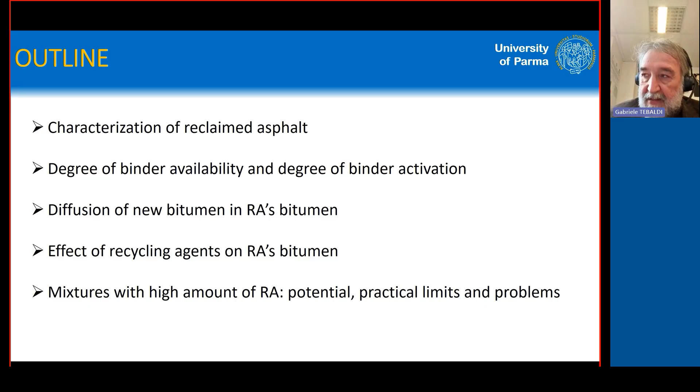I've faced this in my research activity, but I think it's something everyone can face when the amount of RAP goes above 30%. So we can discuss what we can define as a high amount of reclaimed asphalt. We will discuss some practical limits and also some problems related to this particular choice.

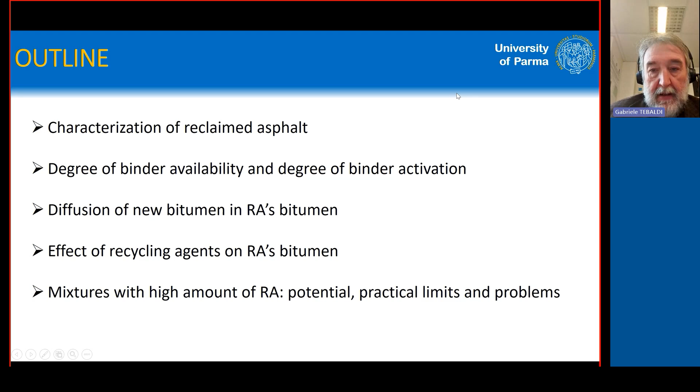So basically we have something we can define as a black stone, a stone covered by aged bitumen, and in general these are the smaller particles. Or what we can define as an agglomerate of stone, or cluster, that is basically the biggest part. These are the biggest component of reclaimed asphalt and are again mainly the result of the milling operation.

In addition, we don't talk about it much, but we have to remember this is one of the most important parts: we have another component, that is the water. The water arrives from the milling process, or from moisture, environmental moisture, or from weather, rain, or other conditions that can affect the RAP if the stockpiles are not covered. We will discuss a little bit more about that.

So these are the elements that we have in hand when we start to discuss reclaimed asphalt. We will go back to this concept several times, but I'd like to underline very clearly that one of the most important characteristics that we always have to remember about reclaimed asphalt is the heterogeneity. It's extremely complicated to have a stockpile of RAP, and even in the same stockpile, the same material, the difference between components is the most important characteristic of reclaimed asphalt.

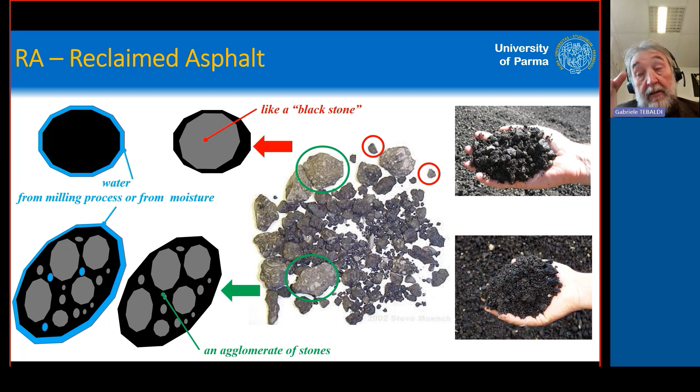Because in one case we have all the weather conditions we can imagine. On the other side, we have just one condition: no light, no rain, same temperature. It's just an extreme example, but if you keep that in mind, you can understand the difference we may have in material that comes not only from the same road, but in some cases from different roads.

What is the origin of the RAP? Again, this is another part that creates this heterogeneity. The RAP comes from an old pavement, so let's say the generation conditions are the traffic load, because different kinds of traffic load can cause different kinds of action in the bitumen, some kind of mechanical massage or mechanical condition that acts mainly on the stone part, but generally acts overall. And we have to remember there are different kinds of aggregate, and different kinds of aggregate interact differently with moisture that comes from snow, rainfall, whatever.

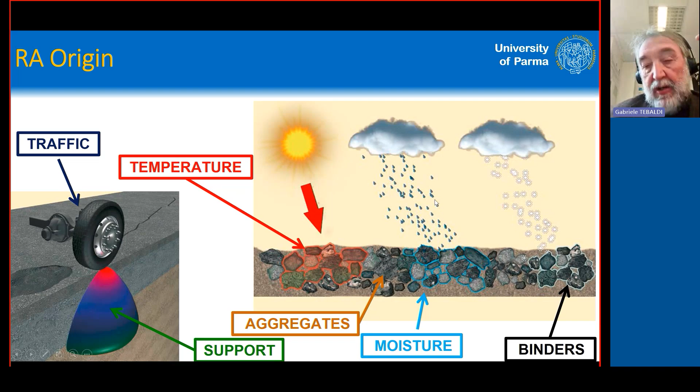We have different kinds of binders in the surface layer, the binder layer, or generally in different parts of the pavement, and each has different results when facing weather conditions, temperature, and aging.

But we also have another element of difference: the characteristics of hot mix asphalt. We may have several types if we move through different wearing courses, and vertically in the pavement. We may have OGFC, stone mastic asphalt, rubber asphalt, whatever. With different kinds of aggregate, we have a very stiff and resistant aggregate in the surface, maybe limestone in the base. So different aggregate, different size distribution, everything can be different.

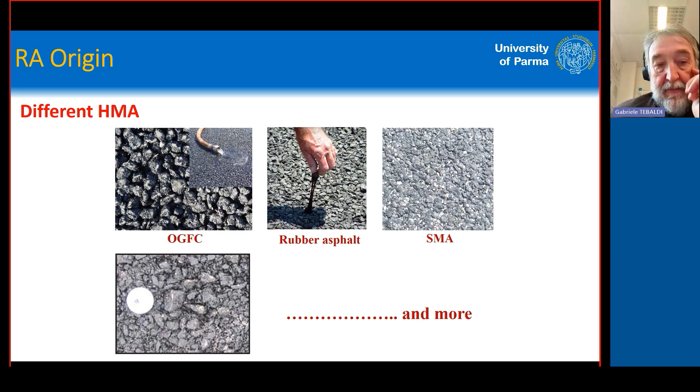These different elements can be made more heterogeneous by the milling operation. The milling operation creates different size distributions in the RAP depending on the capability and force of the milling machine, the speed, and how deep we go. For example, one extreme is a full depth reclamation with everything mixed inside, or we may have a fractionated milling operation, or organized milling operation, where the pavement is milled layer by layer and the material is stored in different stockpiles.

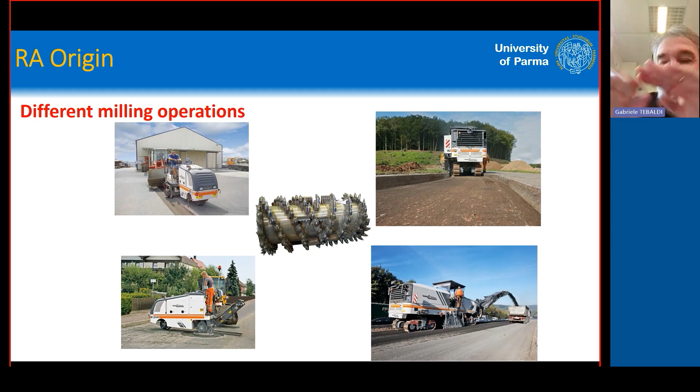Another variable is the pavement condition, the damage level. If we have a pavement with just aged material, we have something. If we start to have polishing, changing aggregate condition, different rutting, it means we have different behavior of the bitumen and whatever else. So that's another level of variable.

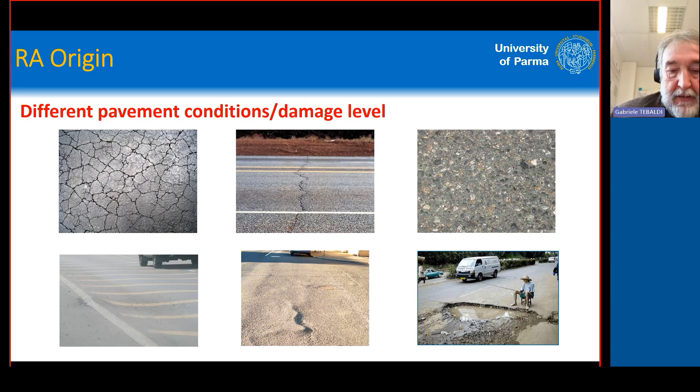Even in this chaotic ensemble of variables, we also have the storage condition and storage time. If we keep the material covered, we'll have less moisture inside than in the case of stockpiles stored outside under weather conditions.

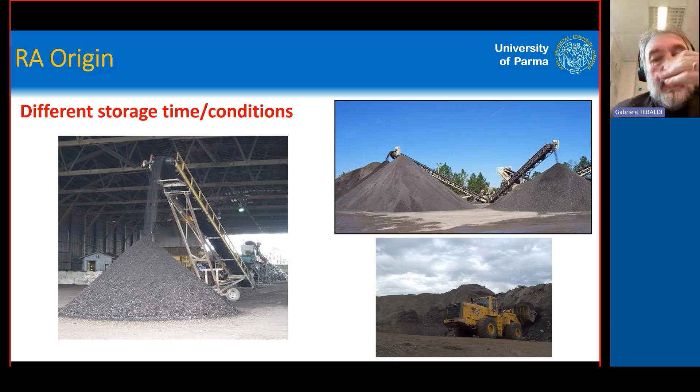But also the time in the stockpile and the location within it changes the characteristics, because if material is on top, it's probably there for a very small time. If it's at the bottom, it's probably there for a long time, under high pressure, with less temperature change, or maybe higher temperature, and this can affect the characteristics of the RAP.

How does all this list of variability impact the characteristics of our reclaimed asphalt depending on its use? As I said, we focus our attention on hot recycling - how we make the asphalt mixture with RAP in hot recycling, following the hot recycling technique.

We have a plant that makes the material. In this case, we have some kind of Los Angeles test, if we can discuss it - so we have abrasion, compression, and different actions on the aggregate. And after that, we have the action of the roller compactor that gives another shear and pressure.

If we have what we decided to call before, black rock, we probably have only the effect of temperature and some loosening or softening of the bitumen. I say probably because if we act with a very strong force, or the aggregate is weak, we may also have some breaking, some polishing, some cracking in the aggregate. But generally speaking, we can say the main action is only temperature.

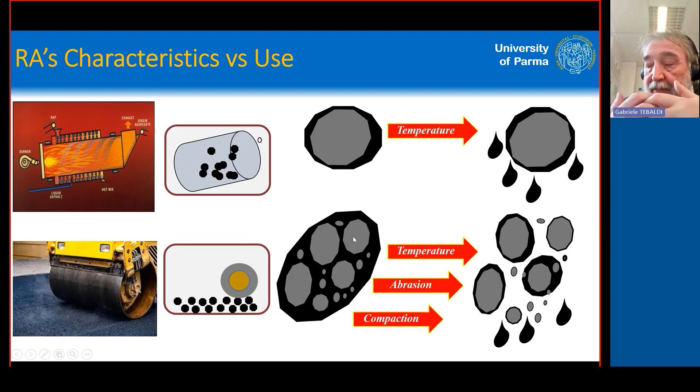But if we have a cluster or agglomerate, all these actions - friction, abrasion, compression - change the characteristics, the size distribution of the RAP, because the cluster is divided not into all fundamental components, but into several parts, due to abrasion and compaction. And again we have the action of temperature, which in this case works in two ways: making the bitumen softer and maybe loosening it, but also weakening the connection among the particles of the cluster, which can increase the disruption of the agglomerate.

And what we have, in terms of the stability of the size distribution - I like this concept because we have to remember, as I mentioned before, we have some changes in the size distribution. So for a good mix design, we need to understand if the size distribution of our RAP is stable or not. Why? Because if it is not stable, we may have problems - we'll have changes. And every change that is not under control, in my opinion, is a problem.

So if we're in the part of the RAP where there's a smaller piece that we can again call black rock, we don't have so much problem in terms of the stability of the size distribution.

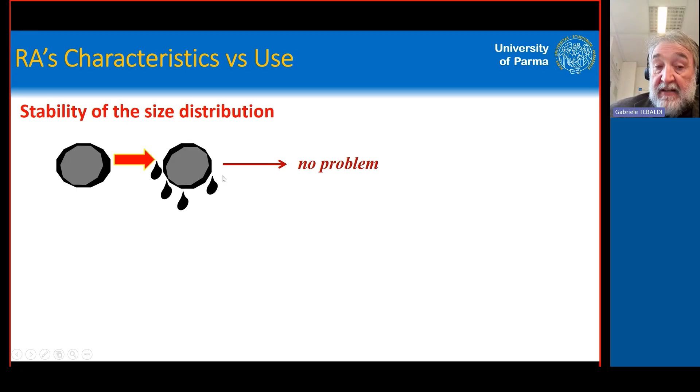If we go with the cluster, the point that we have to keep in mind and the characteristic that we have to analyze is that there is a risk that the final grading curve is not the one that we think, or that we designed in the mix design phase, and we will not find in the construction phase.

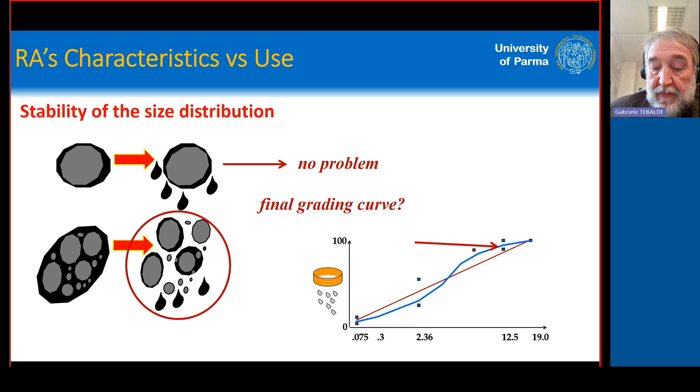If we don't correctly account for the amount of cluster in our RAP, we may have the opposite result: a size distribution that originally is inside the standard requirement can go out, especially in the coarse part. And of course, changing the size distribution in the coarse part also has an impact on the fine one.

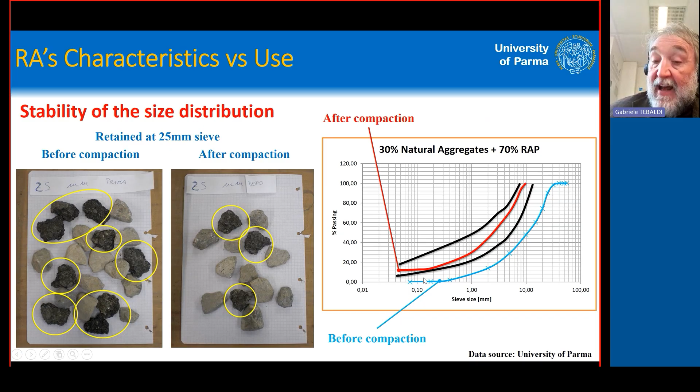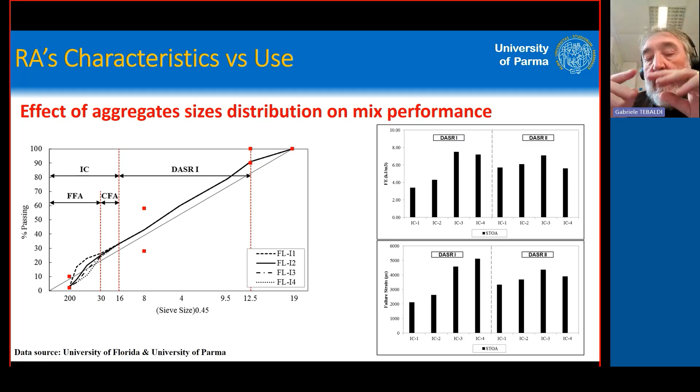And if we go back to this example, this was made on purpose to bring the size distribution in, but can you imagine if a change like that happened unintentionally in a mixture, what kind of behavior we would have? It's very easy to set a very good mix in the mix design phase, and at the end, if we are not accurate in the control of the RAP, we may have a very negative impact on the final performance.

This is important, a concept that is important to understand. If we work with less than 20% RAP, we are in an amount that can induce a level of change that is inside the variance of the test, something that is negligible.

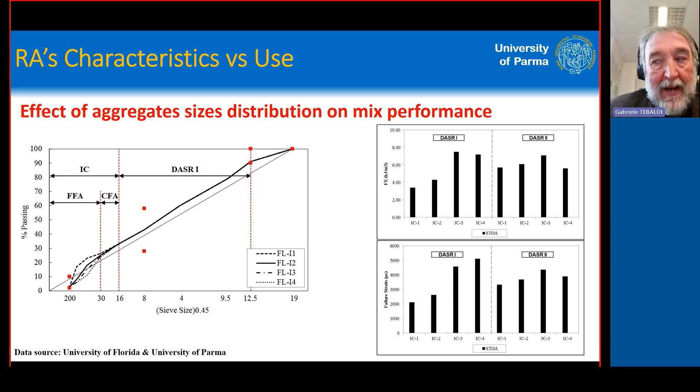When we move forward and go above 20%, with 30, 40, 50 and even more, as now required by a lot of agencies, there is a very big risk that what we did in the mix design phase is not what we have in the field if we are not very accurate considering this element.

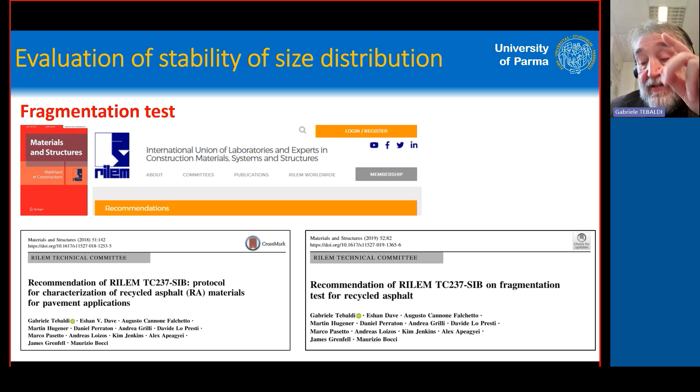A proposal to face this problem was made a few years ago by the RILEM Technical Committee TC237, led by Manfred Partl. Among the technical recommendations that came from the activity of the technical committee, there was one on how to characterize reclaimed asphalt, and especially one test inside this protocol named the fragmentation test, exactly designed to analyze the problem I just described.

The fragmentation test is a very simple test that consists of evaluating the material passing a control sieve before and after compaction.

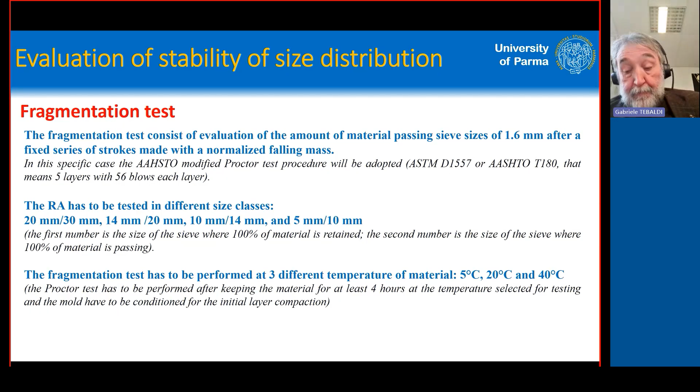Following a French standard for aggregate, the RAP is analyzed in different size classes: 20-30, 14-20, and 10-14 and 5-10, just to have a different idea and to analyze in more detail the size class where it's possible to have clustering. And it's performed at 3 different temperatures to take into account the contribution of the bitumen.

So basically, what does the test consist of? The test consists in taking the RAP, checking with a control sieve, looking at the amount passing, doing the compaction with a Proctor or maybe gyratory compactor, but the idea was to use Proctor.

And again check the material passing on the control sieve. Why the Proctor and why a control sieve? The idea when the test was decided was to have a very, very simple test in order to have something that can be efficiently used in the field.

We cannot have in quality control a test that gives us 100% of information but requires 1 week. Too much time. If we are doing quality control in a paving operation, we need information very fast. Otherwise, we are not in a condition to stop something that I won't say is wrong.

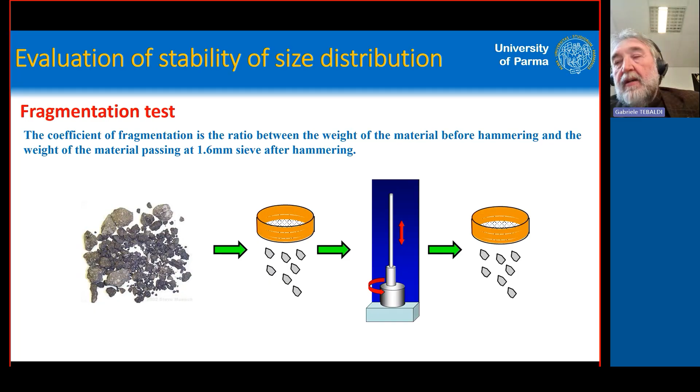This test gives just an alert. The alert says, be careful, the material you are using is not the same as what you tested in the mix design. It's up to the field engineer to decide if this is just a minimum variation or if it's an important variation. And I'll show you some data related to the effectiveness of this test.

During the round robin to validate the test, we tested 2 different RAPs from 2 different parts of the world. You can see here that these 2 different RAPs give different results in terms of coefficient of fragmentation at different classes. So these 2 RAPs, even if apparently similar, are not in agreement in terms of behavior after compaction.

You can see here that changing the temperature, there is a change of the coefficient of fragmentation that is very similar at the 20-30 class, but is totally different at the smaller size, the 5-10 class, and is even different again at 14-20. It means that probably in this case we have a very stiff RAP with very stiff bitumen that only shows differences at the high temperature.

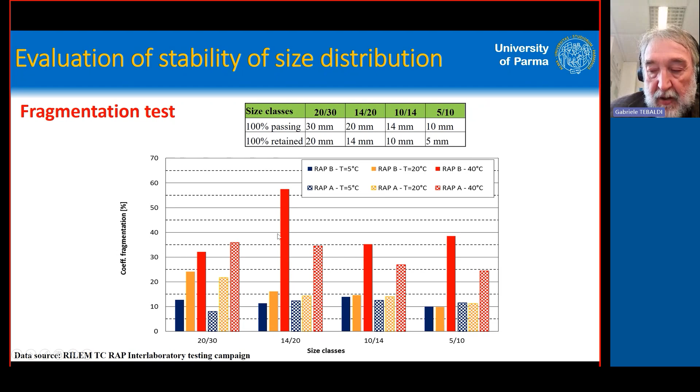Just to show how it's possible to identify changes, we decided to validate the test by taking 2 different materials. One is a normal RAP that we took from the area around Parma, generally a binder RAP, so limestone. And we also took some steel slag.

And we tested 100% RAP, 50-50 — okay, not realistic, but the idea is that in some cases you may have stiff aggregate, a blend of stiff aggregate, or a blend also including steel slag, which in some parts of Italy is currently used for wearing courses.

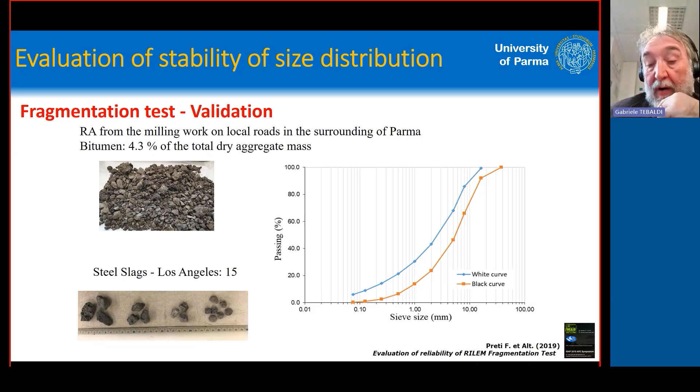So as you can see here, if we have 100% RAP, this is the result of the analysis. But if we move to the same size distribution with 50-50, we have a change in the passing at the control sieve, and this is even more pronounced if we use only 100% steel slag.

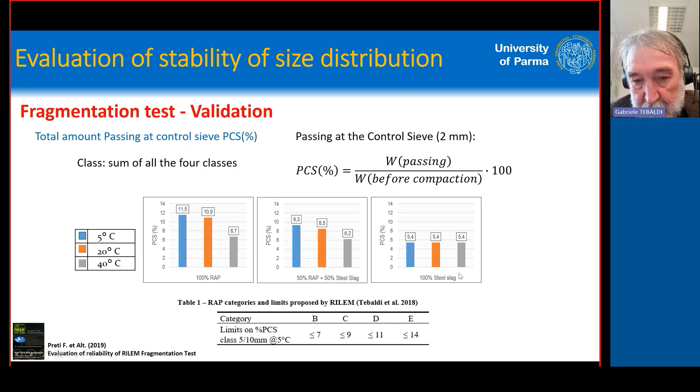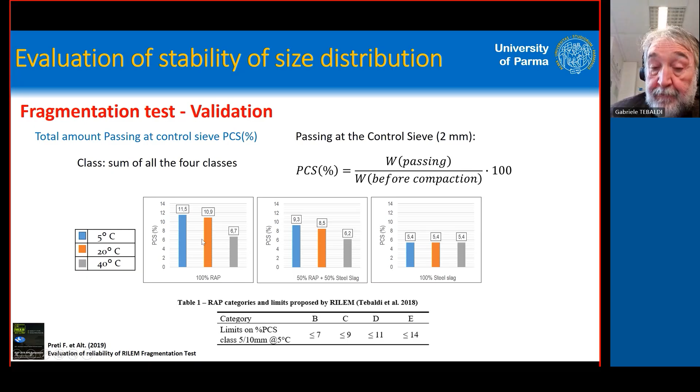So what does it mean? It means that the test is really capable of identifying changes in the stability of the size distribution, because with steel slag, if you compact it, there is almost no change before and after compaction — it's too stiff. But if you compact different kinds of RAP, the value changes in relation to the amount of agglomerate.

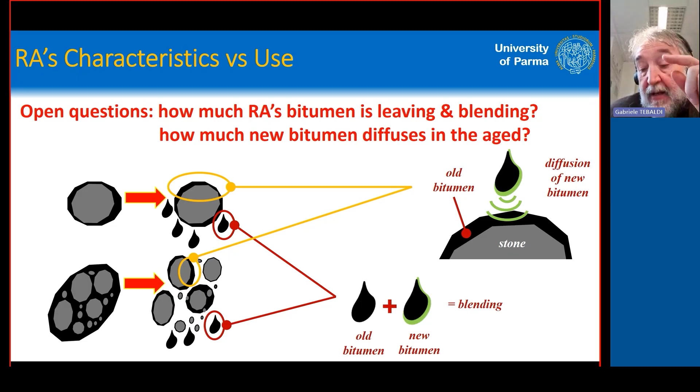The second point we have to remember is the amount of bitumen that is available or can be available, and which kind of phenomena leads the blending. It could be simple blending or diffusion. In my opinion, the bitumen that leaves the RAP is not a lot.

We did a test a long time ago when I was cooperating with EMPA: we made a mixture with just natural aggregate, coarse, and fine RAP, with a very clear difference in size distribution in order to have fast separation with a sieve. Mixing without any bitumen added and recovering the bitumen, we found almost no bitumen in the natural aggregate. We were analyzing just the fine part with the RAP, which had a lot of bitumen, and in that case we found 8%. So there was no bitumen leaving.

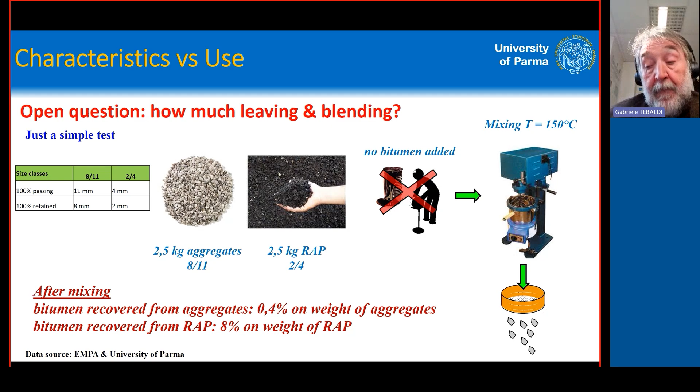Of course, this can change depending on the different condition and characteristics of the RAP. But something that is clear: the other part of the blending can happen through diffusion.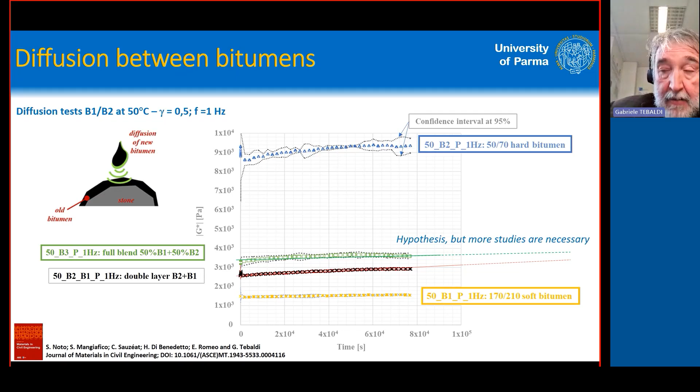So the hypothesis, though of course there is a need for much more investigation on that, is that during the time there is an increase in diffusion that at the end brings a full blending.

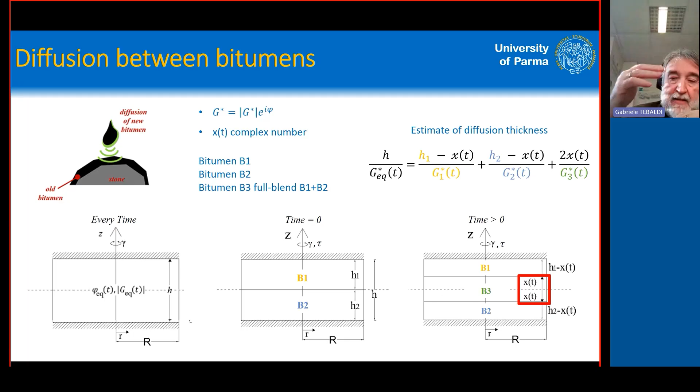I can give more details but just for time, we were able to put together a law to predict the diffusion thickness, and everything is related to the complex modulus. You can see here that over time, the blended zone increases until there is not anymore B1, not anymore B2. It means that the two layers, the coating of the new bitumen, step by step, goes inside the old bitumen.

This is relevant to consider when we design our hot mixture in function of the bitumen that we have in the RAP.

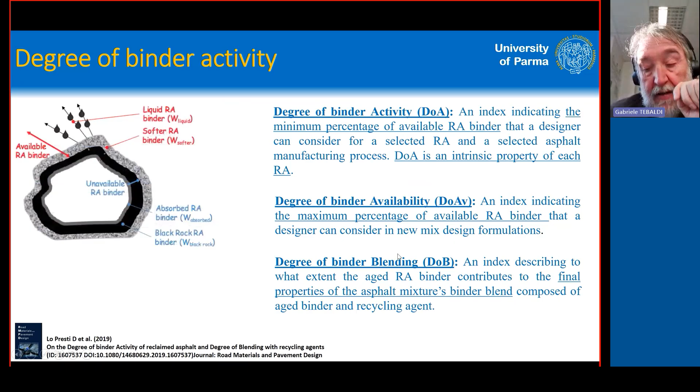Some years ago, a group of researchers led by University of Nottingham put forward three definitions: degree of binder activity, an index that indicates the minimum percentage of bitumen available, so the bitumen in the RAP that is still active to bind our aggregate; degree of binder availability, the amount of bitumen that could be available, which doesn't mean it's active, just available; and degree of blending, the amount of bitumen inside the RAP that combines together with the fresh bitumen.

This is a very complicated concept, simple to show but complicated to prove. This is basically the evolution.

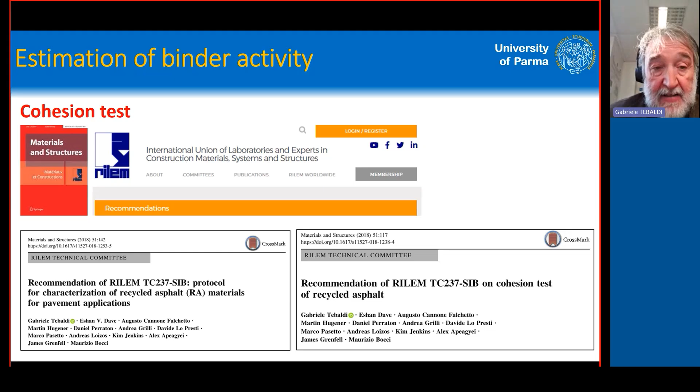Again, there was a proposal from the SIB of RILEM in the protocol to try to get an estimation or indication about the amount of available bitumen. This is called the cohesion test, again very simple, in order to provide a device that identifies differences very fast in the workplace. This is a very simple test.

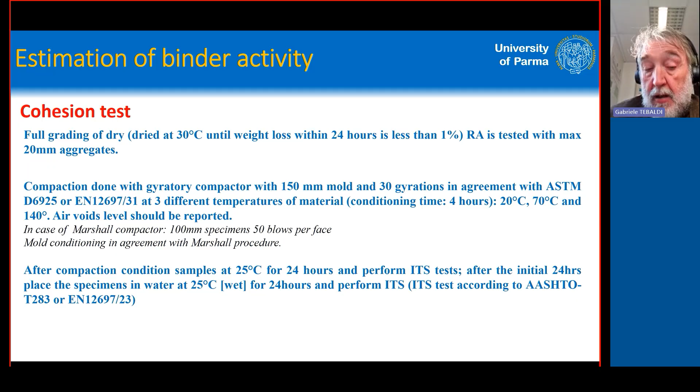The RAP is compacted without any bitumen addition, compacted at different temperatures, and we look at the possibility of having a specimen, and how is the IDT stress of this specimen tested at 25 degrees.

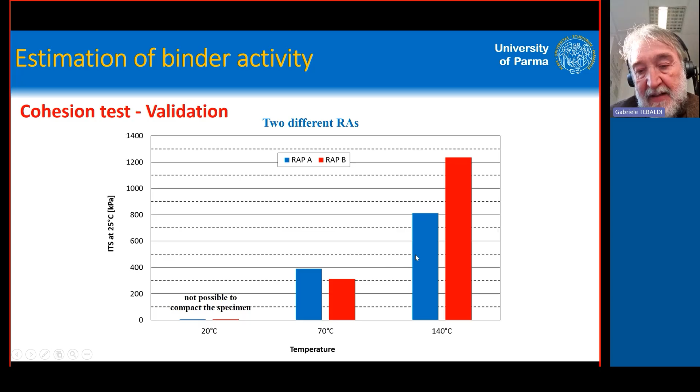Again, to show how this test is able to catch this difference, we used the same RAP, made two specimens, and aged them artificially. Basically what we did was put them under sunshine for one month and boiled for one week just to force aging, then compacted at 70 degrees and did the test.

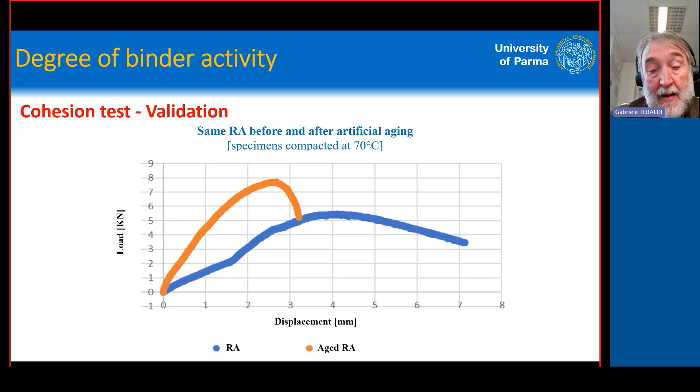Very simple in terms of load and displacement, nothing complex, but something that is easy to repeat and do. You can see here that the aged one is definitely much stiffer than the original one, even though it's the same bitumen. So it's possible to catch some difference. Again, if we compact at 140 degrees, the difference is less, but there is still a difference between the aged one and the not-aged one.

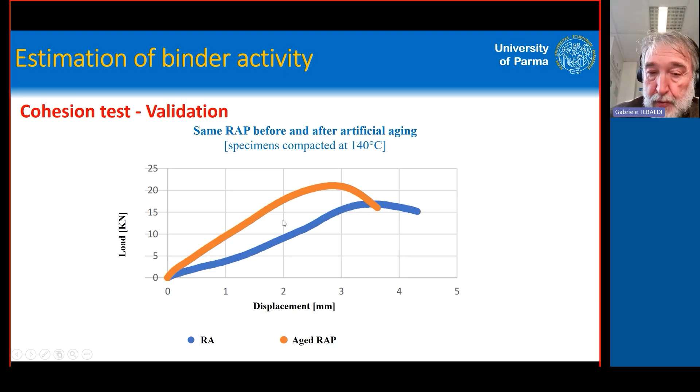Again, I don't see that this is something that can make problems, but it's for sure something that the field engineer has to consider. We have to remember that the size distribution and the air voids can have an impact on this way to estimate.

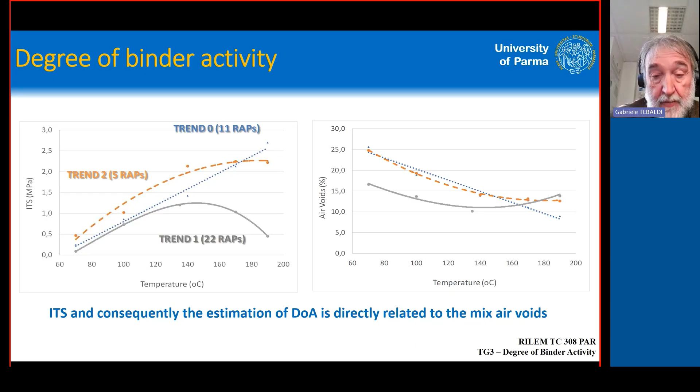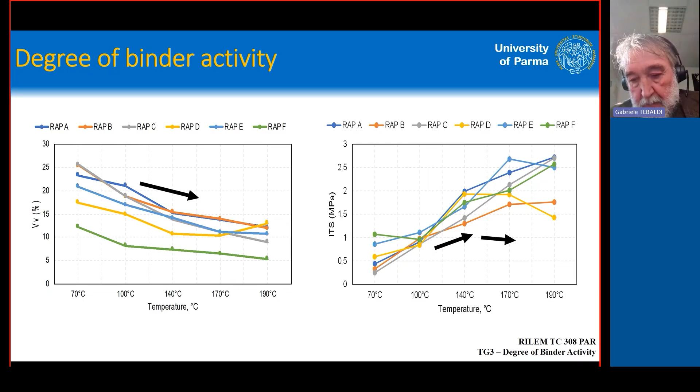This is a general trend that shows there are a lot of difficulties to identify a common behavior. But if you put a lot of sources together, there is the air void that is reducing - the level of air void goes down as we increase the temperature, that makes sense - but the IDT follows the temperature only up to one point, and that makes sense because once the skeleton starts to, there is some kind of plateau performance. This is the reason we can talk about estimation and not evaluation, so we have to really keep that in mind.

If we move to the idea of using as much as possible of the available binder, we have to keep in mind that the bitumen we have in the RAP can be organized into these categories. So we have the absorbed bitumen that doesn't go anywhere, and the fully aged bitumen that we can call unavailable bitumen.

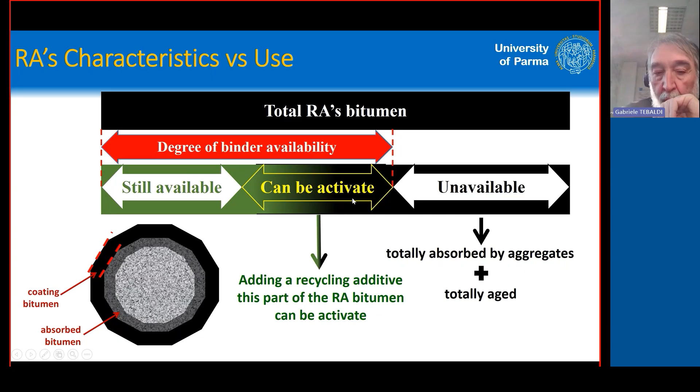But beside that, there is bitumen that is still available, not totally aged, so there is still some characteristic that can make it like available bitumen, or bitumen that doesn't have the characteristic to work but that can be activated. This is the area or the amount of bitumen where we can work to optimize or maximize the effect of recycling, because however much we can activate of the bitumen that is aged but potentially active, that increases our degree of binder availability and, of course, increases the amount of bitumen that we save.

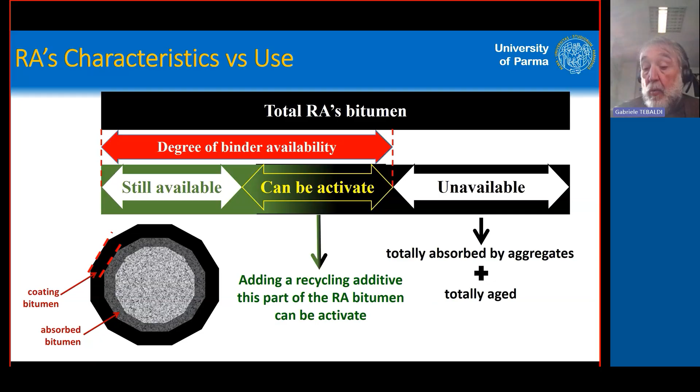If we go a little higher, a solution can be soft bitumen. This is an investigation of the state of the art provided by Laurent Porot. And if we go above 30%, it's common to use different kinds of additives, rejuvenators, fluxants, or whatever, to make available and active the bitumen that comes from RAP.

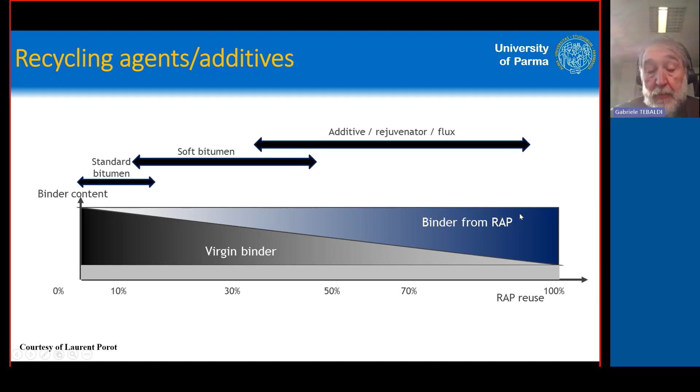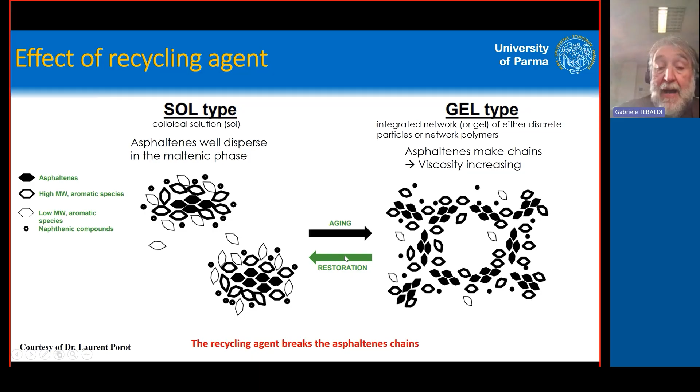It's hard to classify the recycling agents because there are a lot of patents and secrets, but generally speaking, we have recycling agents that work on breaking the asphaltene chains and reduce the viscosity of the material. There are other recycling agents that break the asphaltene compounds.

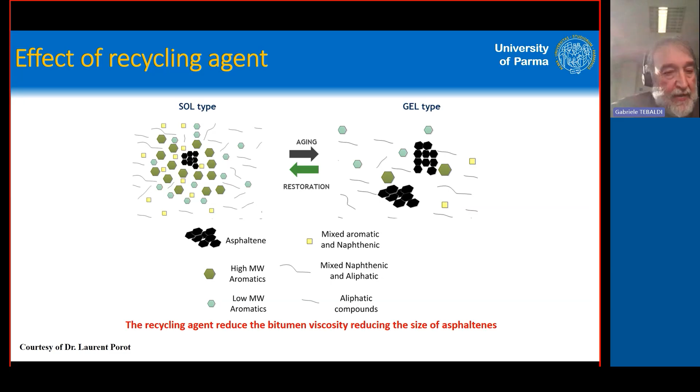Again, looking with the goal to reduce the viscosity of that. There are also, and this is part of the recycling agents, bio-oil or bio-based agents that not only work on breaking the asphaltene chains but also provide some oil that restores or brings back the level of oil or volatiles.

We have to remember very clearly that we call it rejuvenation, but there is no real rejuvenation. The aged bitumen is still an aged bitumen. What we can do is attack, let's say, the bad part of the aging, and we can mitigate the effects of aging. But we always have an aged bitumen in the end. This is something that I think is extremely important to remember.

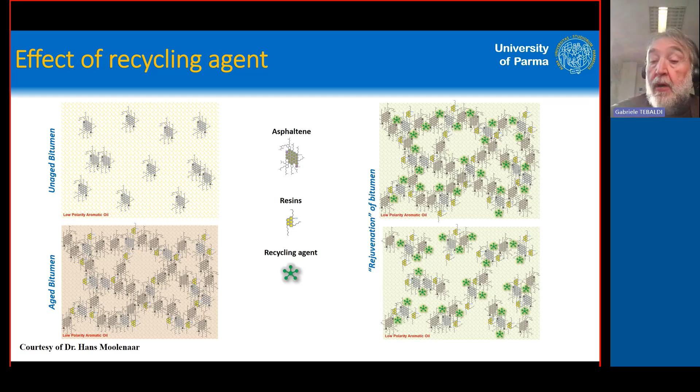If we look a little bit at the performance, we see that generally speaking, when we insert a recycling agent, we have an increase of the penetration.

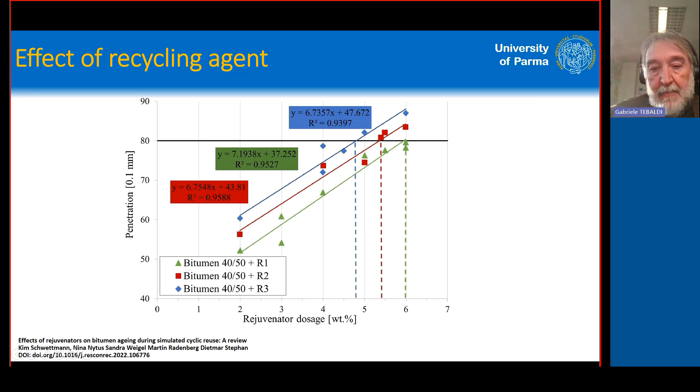This is research I found in the literature, a literature review. Work done in Germany clearly showed that bitumen with recycling agent becomes softer than the aged one. Another work in Germany shows that different levels and kinds of recycling agent reduce the softening point, the ring and ball point of the bitumen, while aging brings the condition of the bitumen back in terms of softening point to the original one.

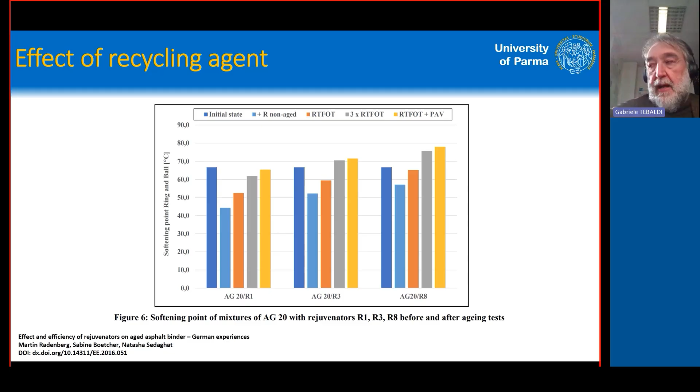So basically, recycling agents bring back, but give still the same level of performance or the evolution of performance compared to natural bitumen. A work made by Professor Canestrari in Italy shows also that, from a different point of view but similar effect, if we add a

recycling agent, we are able to reduce the stiffness. So the G star of the different levels of aging of the same bitumen are lower than the original one. So with the recycling agent, we reduce the stiffness of the bitumen.

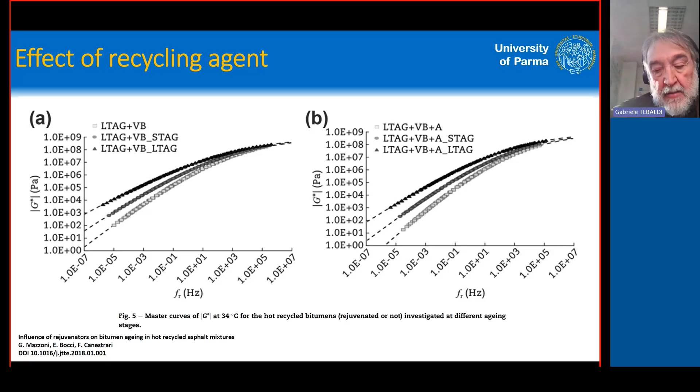That's generally one of the main concerns related to viscosity, together with the fact that viscosity doesn't allow proper coating. This is something we have to always remember. This kind of evolution in terms of softening point and penetration point, in my opinion, is a little bit empirical, but

is extremely important to keep in mind. Why? Because if the agency does quality control of the final mix or the bitumen of the final mix, they only check penetration and softening point of the recovered bitumen. We have to check something like that, because in recovering the bitumen, we force the full blending of the material, and at the end we have

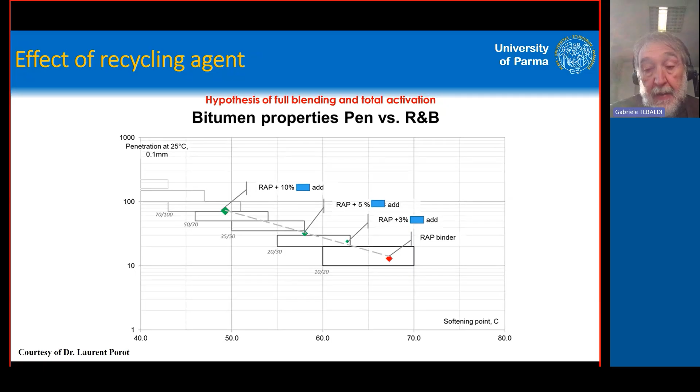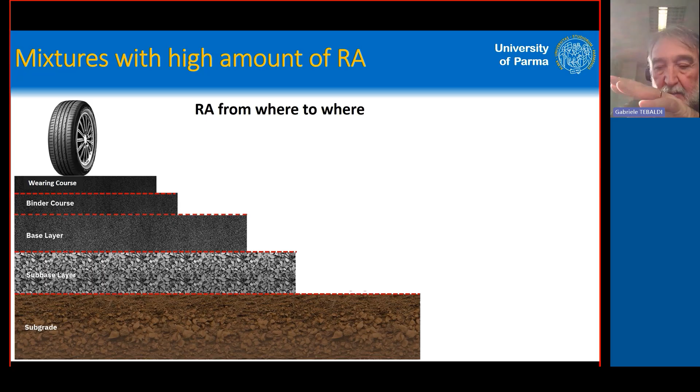If we go very high in the level of RAP, the so-called high amount of RAP mixture, the quality of the aggregate is extremely important, because RAP is not the same, and RAP that comes from different layers cannot go everywhere. If we have RAP, reclaimed asphalt that comes from wearing courses, this is

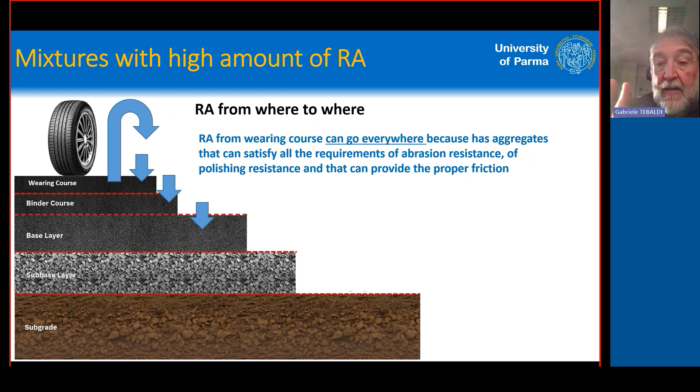a material that can go everywhere, because the aggregate can satisfy the most restrictive requirements in terms of abrasion resistance and polishing resistance. But if we have RAP that comes from binder layer and base layer, this RAP cannot go everywhere, or this RAP cannot go into wearing courses.

This is extremely important, especially if we have reclaimed asphalt that is blended, managed, engineered, whatever you'd like to call it. So if we have our stockpile and we sieve and mill in order to get a very precise size distribution under control, if we handle the RAP, at the end we have to be very sure that in this blending operation there are no issues—we have to understand which kind of aggregate goes in the lower layer or which kind goes into wearing courses. In my opinion, a selective milling operation is required if we think about high amounts of RAP.

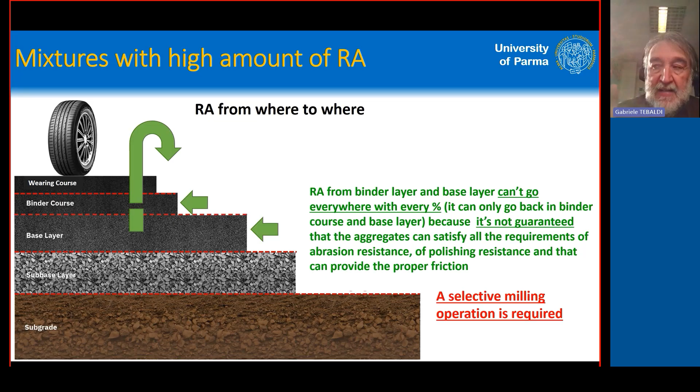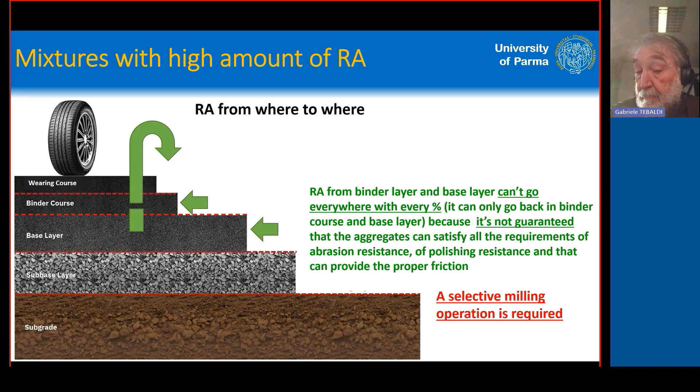Generally speaking, there is a need for at least 40% very resistant aggregate in wearing courses. So if we go up in terms of RAP, we need to guarantee that this 40% is always present. Otherwise, we have a problem with the friction between tire and pavement.

A very simple test that I propose, which we are working to normalize, is to check in a very simple way using hydrochloric acid—it's a very quick and easy test. If we put limestone, an aggregate we can find in binder layer and base layer, into hydrochloric acid, you can see a very quick and evident reaction. And if we put basalt, there is nothing.

Same for steel slag. So this is something that can be done very fast in the field, because the only thing needed is to remove the bitumen with a solvent, even in a brutal way, take the aggregate and put it inside. This is, in my opinion, a very good and fast method to check if there is too much limestone in a wearing course material.

Again, considering the stability of the size distribution, when we face the challenge to put together a mixture with a high amount of RAP, we have to check if we are able to obtain the required size distribution, because it's not always guaranteed that with the size distribution of the RAP we can reach it.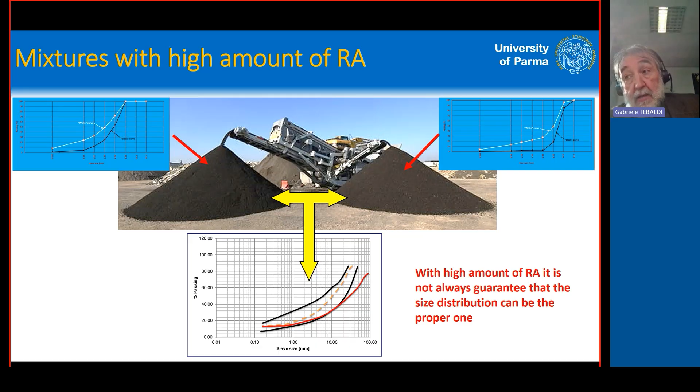Due to the size, maybe there are too many fines, not enough, or whatever. I was in a project where I was so excited to use a lot of RAP, saying we can do 70% or 80% RAP. But when we checked the final size distribution, even if the amount worked, we were totally out, because the size of the RAP didn't allow us to obtain the required size distribution.

So it's something we always have to remember, especially considering that the size distribution of RAP cannot be 100% stable. Another suggestion, something I'm working on right now in a research project, is how to guarantee the quality of the bitumen if we have a high amount of RAP.

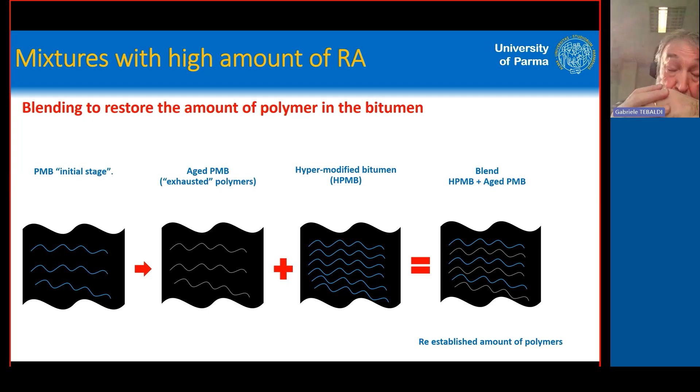If we have a high amount of RAP, it means we have a lot of bitumen coming from it, and of course we like to have a lot of bitumen coming from RAP. This is one of the reasons. So we need to put ourselves in the condition to answer what we are able to do in terms of performance requirements. Or if we use a polymer modified bitumen, are we sure we have the right amount of active polymer in our mixture?

Because generally what can happen is that the aged bitumen or the polymer modified bitumen has exhausted polymer inside that is not active, not able to give us what we are looking for.

So one idea is to use a very high level polymer bitumen, what is called a hyper-modified bitumen, in order to have a blend between the hyper-modified bitumen and the exhausted polymer. This has to be checked in terms of design, to match the minimum requirement in terms of polymer content that provides the performance we are looking for. This is especially important if you're thinking of a wearing course.

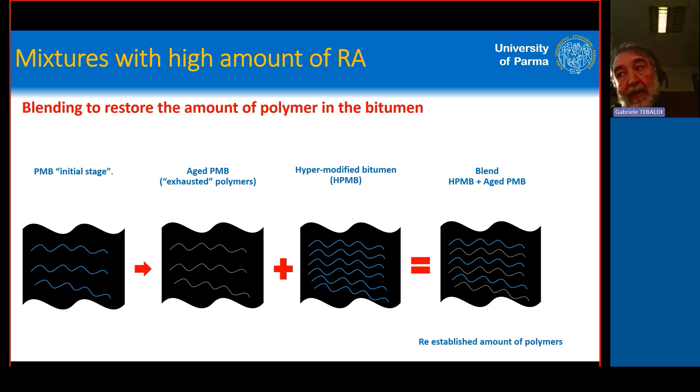Or if, as is now common, there's a request from the agency to do polymer OGFC with RAP. Just in this case, from our experience, the dosage is important, and probably the dosage made by only penetration and ring and ball is not the most appropriate one.

Caution is required. These are some results from a multiple stress creep recovery test at different levels of recycling agent, following a dosage method based on penetration, ring and ball, and viscosity. We can see that based on that alone, a higher amount of recycling agent seems not effective.

Of course, the recycling agent is effective because we have a big recovery in performance in all cases, but it seems that with a higher amount of recycling agent, there's a decrease in performance, as you can see in both cases.

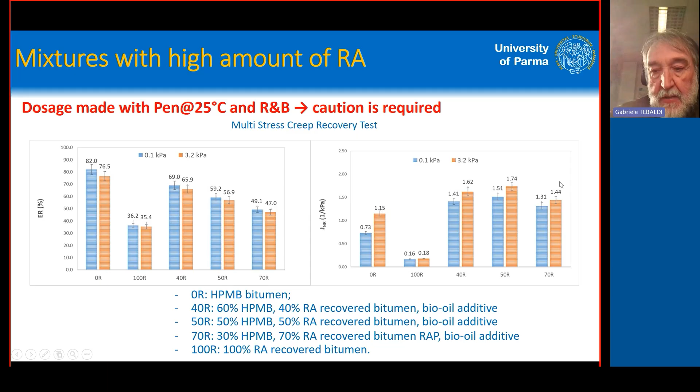But if we look at the performance of the mixture, in this case we analyzed the fracture behavior following the HMA fracture mechanics approach defined by Reynaldo Roque at the University of Florida. You can see that if we analyze the mixture and consider this level of requirement, this is the virgin mixture.

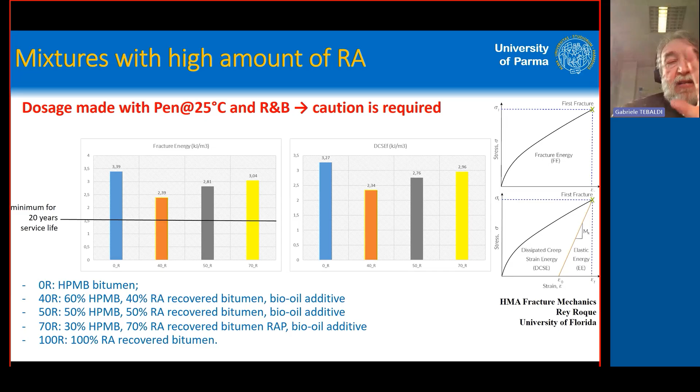If we had 40, 50, even 70% RAP with recycling agent, in terms of performance we're in very good shape. And the more recycling agent we put in, the higher the performance we have in terms of the mixture. This means that if we analyze only the bitumen, and if the dosage is based only on penetration and ring and ball, there's probably something we're not able to catch.

So my proposal is that if we go into mixtures with a high amount of RAP, it's important to have a rheological-based dosage process. This is something we have to think about, and of course research is required, and we need to work on that.